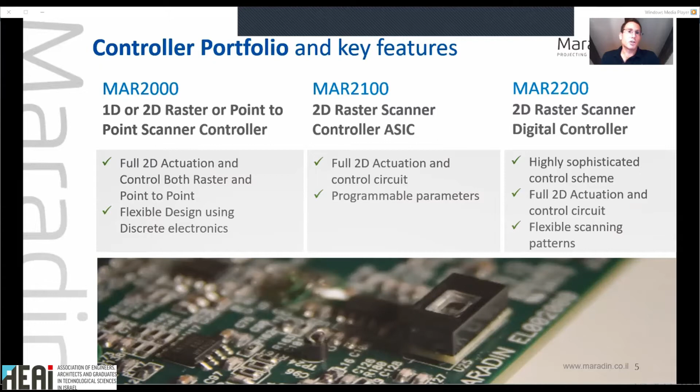In order to reduce time to market for our customers, Maradin provides a full picture-generating unit reference design. The reference design includes all it takes to design a laser projection unit: data flow, an API, a graphic user interface, and a proprietary timing algorithm implemented on FPGA, completing an end-to-end scanning solution. To date, the reference design has been licensed to many customers, and a new digital version is coming soon.

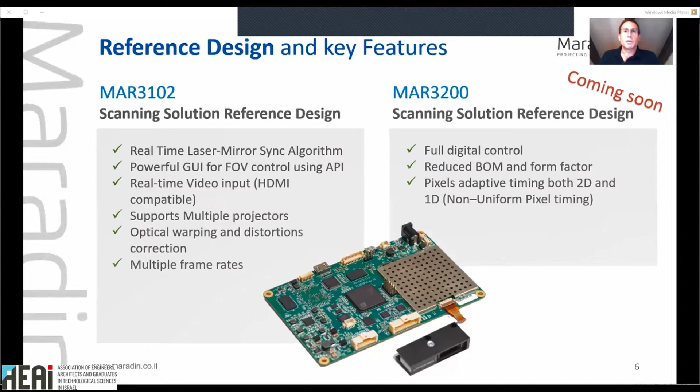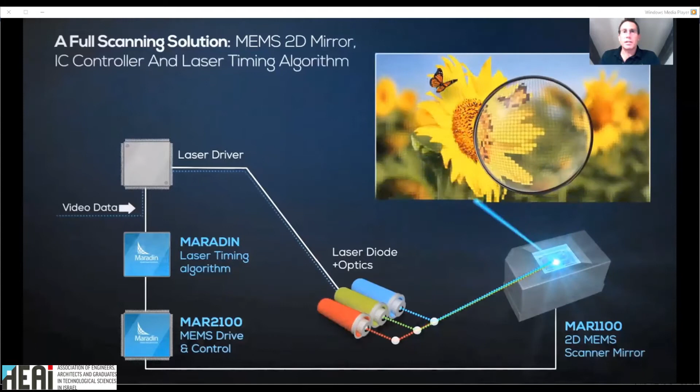Let me share with you a short video presenting how the MEMS micromirrors, controllers, and system firmware are combined together, providing high-quality images. Three lasers are combined into a single beam. The MEMS micromirror scans the beam on a screen, pixel after pixel, very fast. Our eyes cannot see the fast scan and see a beautiful image. The MEMS movement is controlled by the controller, and a proprietary algorithm synchronizes the data going to the laser drivers with the MEMS position.

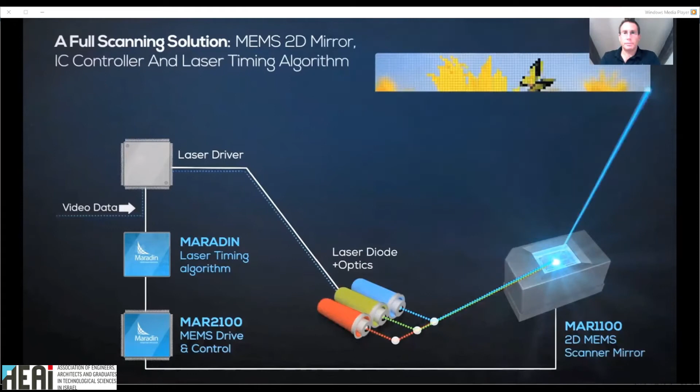To sum it up, whatever your product is, we can make it, providing your product with the wow effect of lasers, increasing your USP, all with the best thermal management and in a small form factor. Maradin is your ideal partner for automotive laser products.

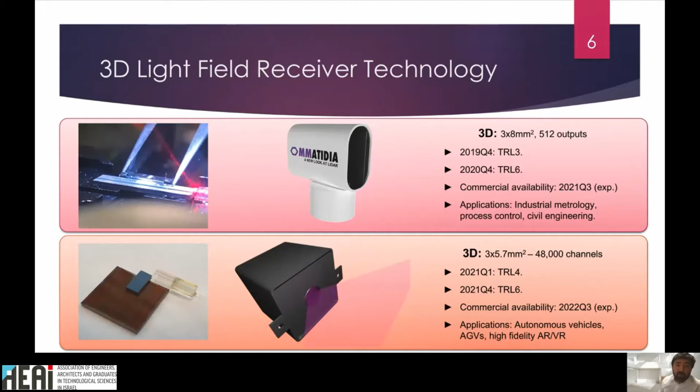So our positioning as a company is in the intersect between flood illumination, so really putting light into the whole scene in parallel, and continuous wave. Thanks to our proprietary sensor architecture, we are able to combine these two features in a unique way, allowing us to increase the optical power available, and from that we derive very high resolution, sensitivity, and range.

In terms of markets, we are focused on the railway market, where we have a number of projects planned for both rolling stock and infrastructure. The space market, where we have a running project on metrology of large deployable structures with the European Space Agency, and down the road also automotive and some other high volume markets. We're currently open and interested in exploring collaborations with application partners.

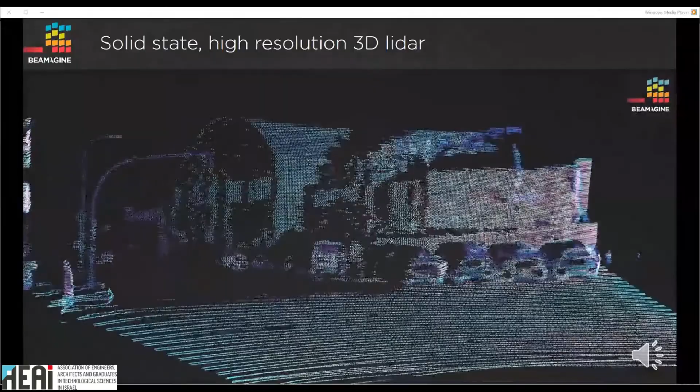RGB camera and LiDAR fusing each point in the point cloud with the corresponding 2D image. You may see that if we implement this, you can do it in real time, okay? You may have the superposition of the point cloud with the RGB information in every moment of the scene, perfectly synchronized at different levels of resolution.

You may see that it's a 2 centimeters, 3 centimeters wide bar here, and you may see how data is completely fused. So you can transfer your 2D information or your 2D processing onto the 3D point cloud, or conversely, as you prefer, making it extremely easy to train your AI. This worked very well along different development programs we've been working. We've done that with polarimetric imagers, with thermal imagers, with a number of imagers. So essentially, now what we've been working in

My name is Thomas Hanske and I'm from Jabil Optics Germany, and I would like to give you an overview about automotive projection systems. Let me share my screen with you and let me start my talk now. First of all, I would like to give you a short overview about Jabil and what we can contribute to the topic of projection around the automobile.

Since Jabil is a manufacturing service company and not a product company, you are probably not familiar with Jabil because you don't find this as a brand in any shop or supermarket. However, Jabil is one of the largest manufacturing service providers operating in various fields. This includes consumer electronics, automotive and transportation, healthcare, packaging, and connected devices. Jabil itself has more than 240,000 employees at more than 100 locations all over the world. Last year, Jabil closed with a record revenue of $27.3 billion.

But Jabil is not only a manufacturing company. Besides manufacturing service, we offer product, process, and equipment design for mass productions. This includes full product design, optomechanical design, development and integration, industrialization, and deployment of products for the serial production. For Jabil Optics, this applies especially for projection imaging systems, which are used in the following applications: augmented and virtual reality systems, LiDAR, 3D sensors, and advanced camera systems.

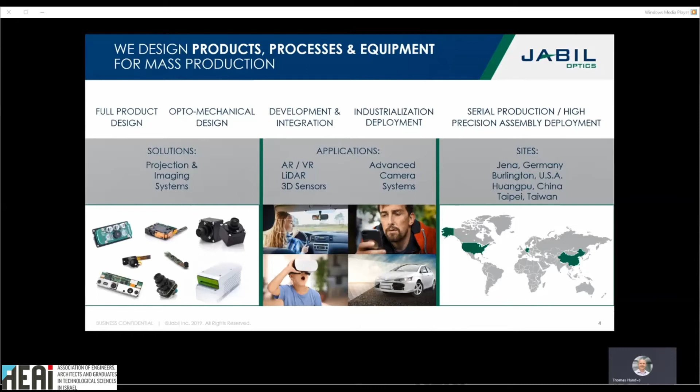Now I would like to talk about our automotive optics capabilities. As mentioned before, one of the design sites of Jabil Optics is based in Jena, Germany. And this is where I'm coming from. We started in 1996 as a department of the Carl Zeiss company with designing optical modules for the Texas Instruments DLP technology, which is a mirror chip that reflects the light onto the wall or into the surroundings. With this mirror chip, it is possible to build optical modules for different types of projectors, rear projection TVs, head-up displays, as well as a lot of other applications.

With the transition to Jabil in 2006, we became the Optical Competence Center of Jabil, supporting all optical device design activities within Jabil. On this slide here, you see some of the prominent design examples. For instance here, this is one of the first optical modules for DLP we started with. Then our focus was in the rear projection TV. This is an optical engine we designed. What you see here is a camera system with a very tiny camera of 15 by 15 millimeter, designed for life science application and endoscope application. In the last year, our focus was mainly on LiDAR.

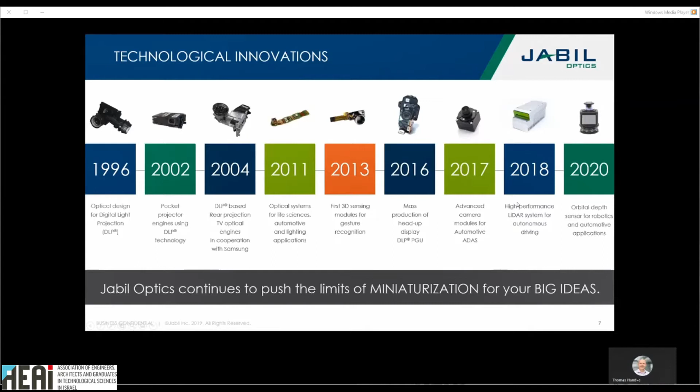Our projection experience, of course, is not only limited to DLP technology. We have also experience with LCOS systems. Here we have designed a very comprehensive near-to-eye application. On MEMS systems, we have worked on a 3D sensing application, what you can see here on top of the module, and MEMS is also used in the LiDAR. As already mentioned, here are two examples for DLP technology. One is a Pico projector that has been integrated in a Samsung mobile phone, the so-called Samsung Galaxy Beam. In addition, we also have experience with micro LED and OLED, for instance, for virtual reality goggles.

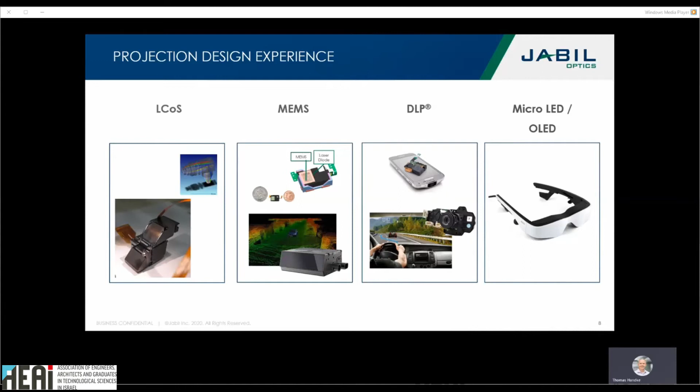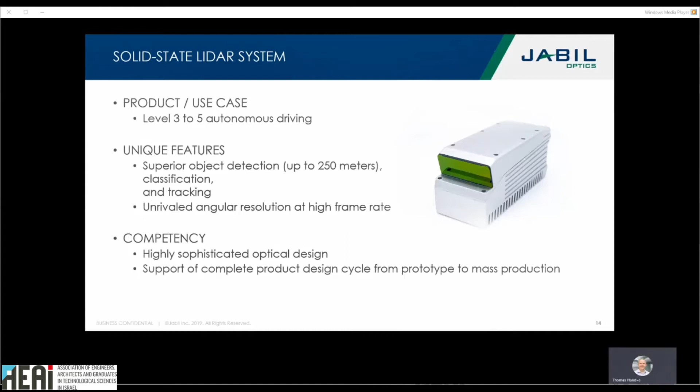A nice example of the combination of projection and imaging technology you see on this slide. Here we designed together with our customer a complete LiDAR using infrared laser diodes and MEMS technology for projecting and imaging. Now I would like to take a look into new automotive applications.

Here I would like to introduce dynamic ground projection. As I'm sure you are aware, this is a projection from the mirror or the door sill onto the ground for interaction with the driver or for vehicle-to-pedestrian communication. The new trend here is that the static projection with a gobo projector is now going to be replaced by a dynamic projection using, for instance, TI technology.

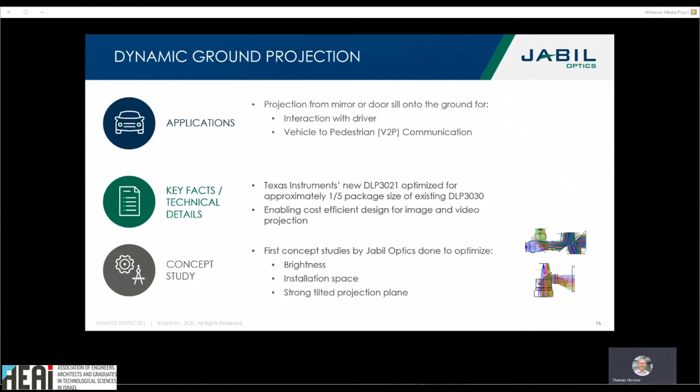TI is supporting this by introducing a new DLP chip optimized in packaging size and enabling cost-efficient design for image and video projection. From our side, we have already done some first concept studies to optimize brightness and installation space. We also looked into the strongly tilted projection plane and made some evaluation of how we can deal with it.

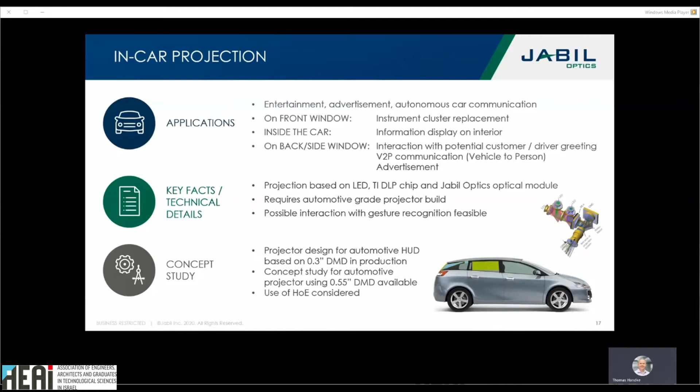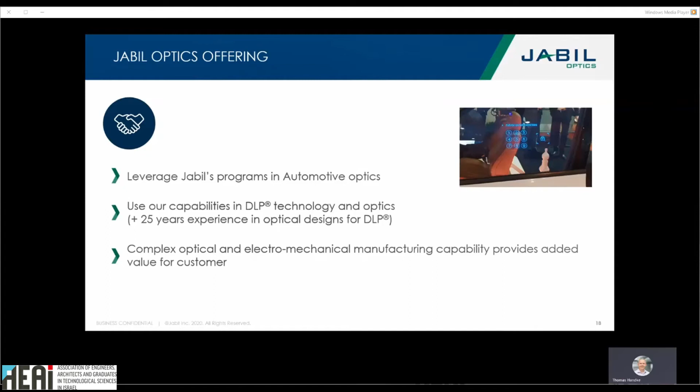Let me summarize our offerings. You can leverage Jabil's automotive programs in automotive optics. We can offer you the use of our capabilities in DLP technology, and this is more than 25 years of experience in optical design for DLP. And Jabil can offer you huge manufacturing capabilities, also tailored for complex optical and electromechanical systems. I hope I could give you an interesting overview of Jabil and projection technology for automotive.

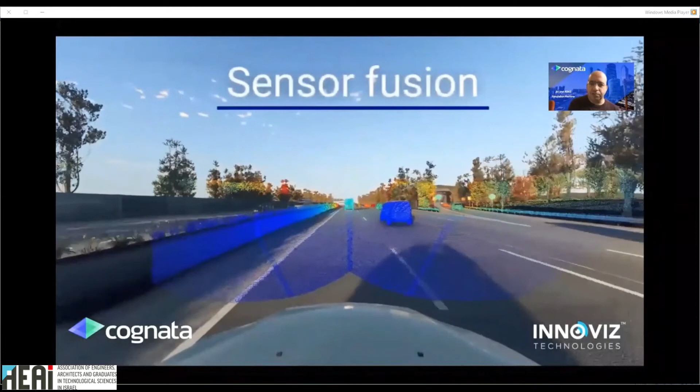So here you see, first of all, the Cognata rendering, which is high quality. And then on top of that, the Innoviz LiDAR. Again, it's simulated, and this point cloud is fully annotated. The drive looks quite realistic, and utilizing that, you can remove a lot of training and validation hours and do it with a fraction of the cost.

The third modality is radar. Again, we're sampling actual materials, having their radar cross-section values, and we also do a multipath reconstruction, so we'll have ghost targets. Now we'll improve the quality again. You can see the red and cyan dots are coming from the radar reflections, including all the ghost targets. And as you can see, it's quite realistic to those who are using radars. This is what you would expect in real radar.

Now, how do we do it? So we have simulated sensor characteristics starting from materials. Each object in Cognata is divided into more than 50 materials, different materials for the taillights, for the windows, for the asphalt. And then we are cross-correlating it with actual measurements for each modality, if it's a radar or LiDAR. We do physical distortion modeling for stuff like lens distortion or rolling shutter for camera.

Here you can see a fisheye camera. And then we have the rendering, like I showed you with the deep net, with the camera, for example, or physical rendering like we're doing for the LiDAR. And you can see here the thermal camera, and this is a LiDAR.

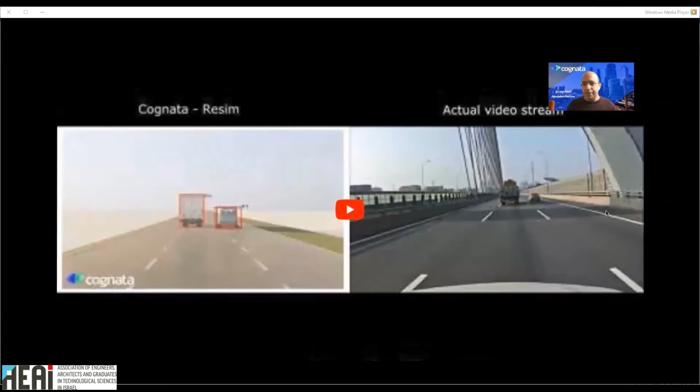So we're using here a computer vision-based technology that takes all the data from the right-hand video and puts it into the simulation. But not only that, we get all the distribution and statistics of different objects from real life into the sim. So for example, after ingesting 1,000,000 miles, we can tell you, okay, if you want to make something that would challenge your algorithm, let's put a lot of cyclists, let's put people on skateboards, on scooters, on tricycles, etc., and then you get something interesting to test your system with.

So if we summarize the process that we're doing, we're ingesting a large-scale amount of data. We analyze what are the distributions inside this data, and then we generate relevant data for training your algorithm, kind of like balancing the data. Just taking what is interesting and putting it there.

Now, after we know what needs to be generated, we have a variety of environments that we can pick from, a variety of object catalogs, all the possible traffic signs, all the possible traffic lights, cyclists, motorcycles, vehicles, all the types, thousands of those are available with different levels of fidelity, rusty, not rusty, bent. So we can find a lot of combinations which are almost impossible to find in real life. And when you find them in real life, you might have a failure.

And then for each sensor generation, for each data that we are generating, we're creating ground truth. And for that, we have all kinds of ground truth, from 3D to 2D bounding boxes, lane line segmentation, instance segmentation, class segmentation, and others.

Now, how can synthetic data help you? Synthetic data is accurate and comprehensive, and the annotations are automatically done almost on the fly. The content is diverse and tailor-made to the actual distributions that you need. So we are creating a solution to the problem that we are presented with, whether we are presented with actual data and analyze it ourselves, or you come to us with a plan and we fulfill it for you.

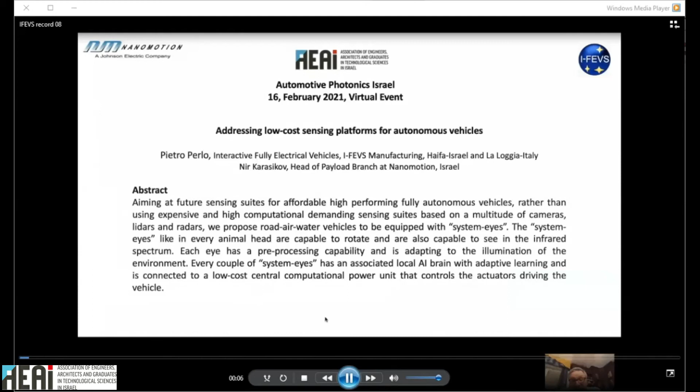Good afternoon, this is Pietro Perlo, the chairman of IFEVS Manufacturing, and together with Dr. Karasikov, the head of the payload branch at NanoMotion, we will present the development we have on a low-cost sensing platform for autonomous vehicles. We will follow as much as we can the suggestions of the organizers, describing first our company, and the goals we have in terms of development towards autonomous vehicles. We will emphasize, of course, the development we have and the need to collaborate with other Israeli companies.

Now, IFEVS was started in 2011. I was a former director at Centro Ricerche Fiat. We are focused on manufacturing safe, efficient, and let me emphasize, affordable electric vehicles. We start from 138 granted patents. We collaborate with a large number of R&D organizations in the manufacturing world.

Our business model is very simple. We collaborate with national entities to produce electric vehicles. We are currently producing fleets in Italy, and we are addressing large-scale manufacturing in other countries. In Israel, in particular, the idea is having a manufacturing hub of innovative electric vehicles. In our factory, we develop passenger vehicles, vans, and bikes, and in the future also non-road vehicles.

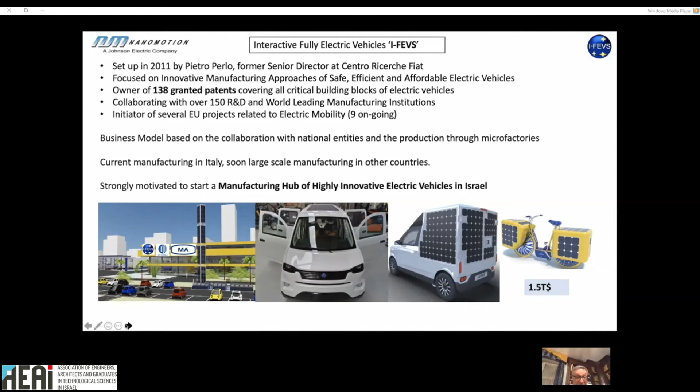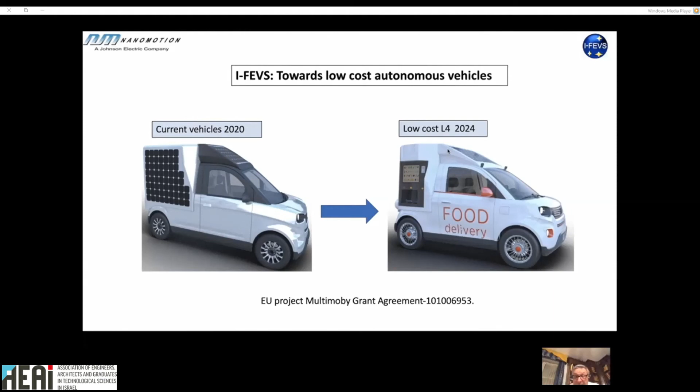Now, the starting point is our van, which we already have and we are already producing at fleet level. The idea is to move from conventional vehicles to low-cost autonomous L4 level by 2024. And for this, we are already supported by a grant of the European Commission.

Now, for this to be possible, of course, we need to satisfy many requests in terms of functionalities, and to satisfy all these requests, one single technology, of course, is not sufficient. We need a combination of lidars, radars, and cameras to get, let's say, the performance needed for fully autonomous.

Now, all of this, of course, is scary in terms of complexity, because we have far-field vision, near-field vision, and we have side vision. We need park assistance and so many functionalities, which indeed usually require hundreds of people to develop the needed sensing platforms. Now, lidars and radars are active sensing units. And of course, this needs to be combined with advanced navigation solutions, including GPS. Clearly, this is a very high level of complexity.

Now, let me provoke this conference a little bit, saying that LiDARs and radars follow the postulation of the extramission theory, in which rays are essentially emitted from the eyes. A theory that was endorsed since the 5th century before Christ, and that continued for some other 2,000 years. Now, with LiDARs and radars, usually the sensing suites are composed of 20 up to 30 sensors, and this means complexity, high computation, and cost.

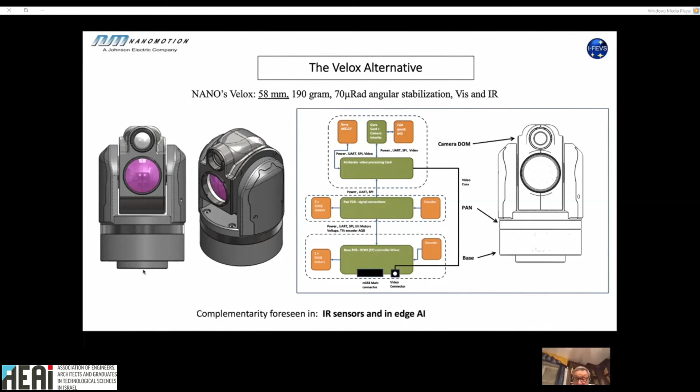Looking at the performance of these gimbals, you see that we are starting from conventional cameras in the visible, and we are also using today cameras that are quite expensive in the infrared, but we have already understood what we can apply and already produced in Israel, by the way, replacing the current US sensors that are introduced in the gimbal. Let me emphasize that the gimbals are quite robust.

They are already used in the military world, and they, of course, satisfy the standards, but still not enough for what we are addressing in the automotive in terms of sealing and low-cost development. Now, the peculiarity of these gimbals is that, of course, they scan the environment horizontally and also vertically, but they also do another thing. They can work together in couples, doing a triangulation. This has an implication in terms of simplicity of elaboration, because you start from an image and at the same time you also have a simplified interpretation of distance and size of objects you are encountering.

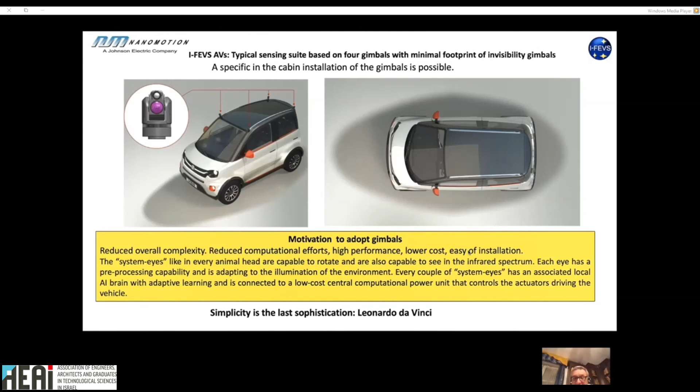We are essentially proposing what the animal world is doing, using eyes, a combination of eyes, and eyes in movement together with the head. Essentially, we propose a very sophisticated solution, which is a synthesis of simplicity, I would say. As Leonardo da Vinci was saying, simplicity is the ultimate sophistication. Once we have installed the gimbals on the car, we need the car to be autonomous, which means that we need unsupervised learning techniques.

This can be done using standard digital processors. In fact, there are already very advanced digital processing units available in the market for this. But there is also another opportunity, which is using a novel embeddable analog MRAM-based accelerator, which, according to our estimation, is 10,000 times faster than what the market is offering now. For this specific development, we are collaborating with the Moscow Institute of Physics and Technologies and other Israeli institutions.

Now, what is the market potential? For sure, LiDARs and radars and other combinations of multi-cameras will reach the market, are already in the market, and the expectation is that a plug and use platform will be available by 2025 at $4,000, $5,000 or even less, and this platform will be widespread by 2030.